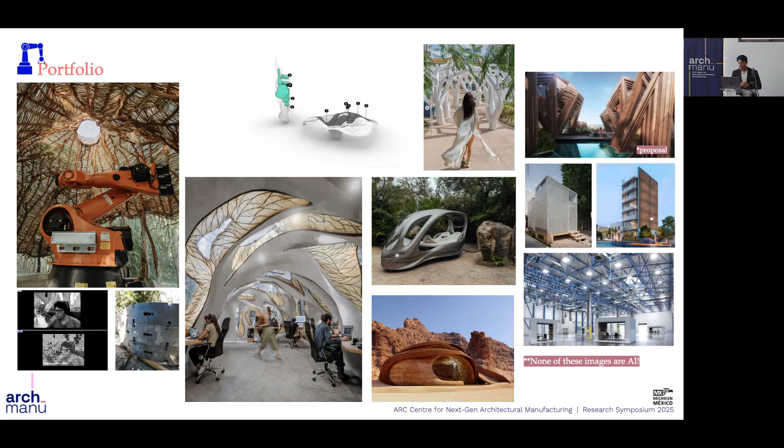So these are just a few examples of my previous work. All of them are real, by the way, no AI here. My experience has often involved blending natural landscapes, digital crafting, and custom code development, something that I look forward to applying during my research.

Right, so let's start with a picture of Australia. This image tells a story about a promise we're struggling to keep. Across the country, there are ambitious targets for building new homes set under the National Housing Accord. Nationally, the target was 60,000 homes per quarter of the year. Having completed just under 44,000, that's a shortfall of around 17,000 homes in just 3 months.

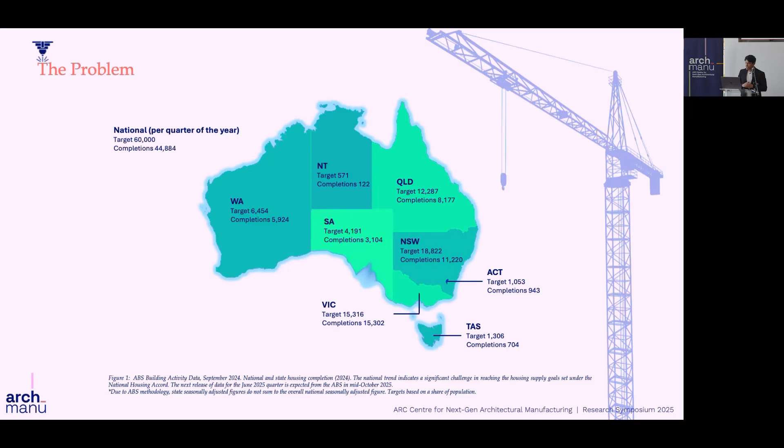As you can see, from Western Australia to New South Wales, this isn't an isolated issue. The national trend is clear. We are facing a significant challenge in delivering the homes that Australians need.

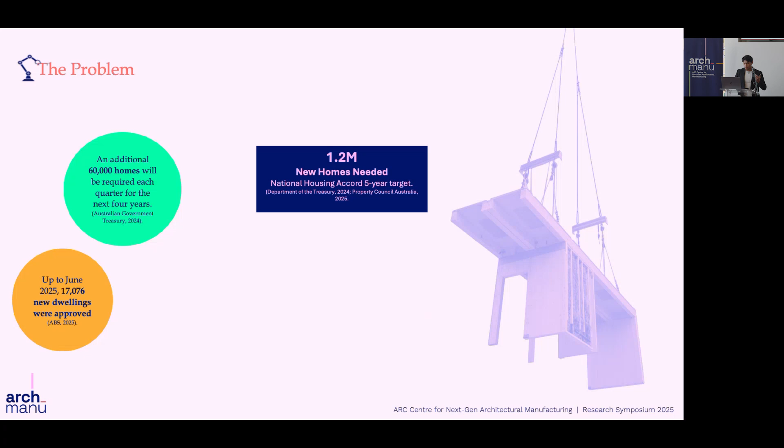So let's put some scale to that challenge. The national goal is to build 1.2 million homes over the next 5 years. To meet that, we need to build an additional 60,000 homes every single quarter of the year. The numbers are very, very low at the moment, and we are actually struggling to even get approvals ready.

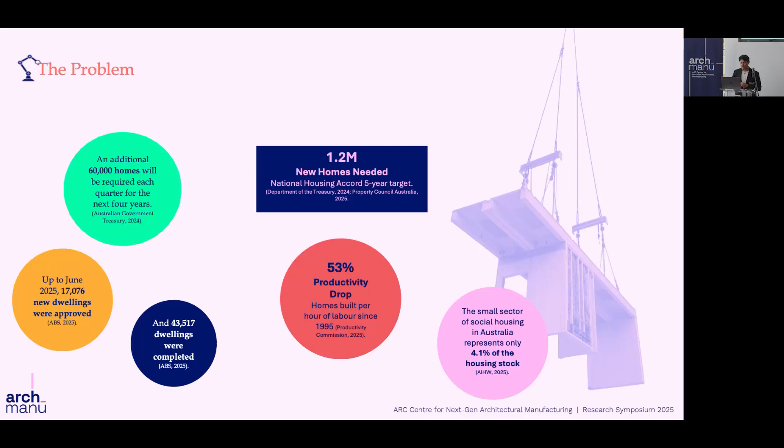But here's the paradox. While the demand for housing is soaring, our ability to build is actually going backwards. Incredibly, our productivity, the number of homes we can build per hour of labor, has dropped by 53% since 1995. Think about that. We are half as productive at building homes today as we were 30 years ago.

This crisis hits our most vulnerable the hardest. Social housing represents a mere 4.1% of our entire housing stock. There is a roadmap, however, that aims to tackle this by doubling the smart buildings market share and dramatically increasing the use of prefabrication. But as the latest figures show, we are nowhere near the pace we need to achieve this goal.

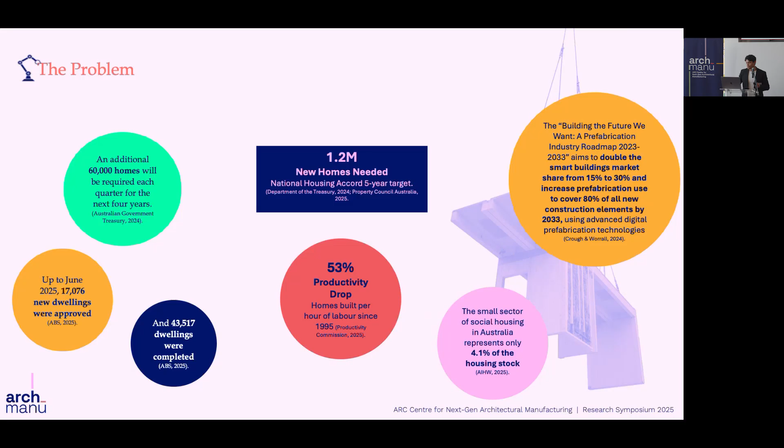Now, you might be thinking this is an overwhelming, almost impossible challenge. I would like to show you how other advanced economies are facing the issue. In Scandinavia, almost half of all houses are built off-site, with some estimates as high as 80%. In Japan, prefabrication isn't seen as cheap anymore. It is often associated with high earthquake resilience.

And Germany, for example, is using modular housing construction for single-family homes. And then we have Australia. We are using these modern smart building technologies in less than 5% of our construction. We have an ambition to triple that to 15% by next year. But the hard truth is we have no national strategy. We are being left a little bit behind, so this is a competitive disadvantage on a global scale.

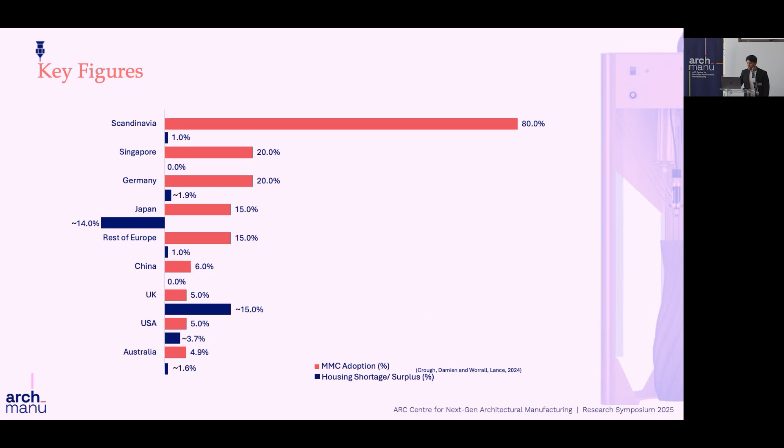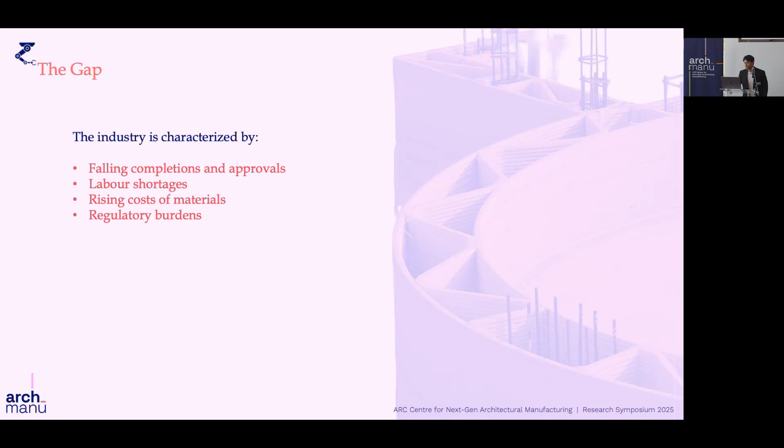In contrast, several countries with the lowest adoption of modern methods of construction are facing the most severe housing crises. So let's put it all together. What is the core problem? Our construction sector is facing systemic challenges. Falling completions, labor shortages, and rising costs are undermining our national housing goals. We have a proven solution, prefabrication and modern methods of construction, but our industry remains fragmented and slow to adopt the very technologies that could save it.

This fragmentation, this reliance on old ways, is part of the inefficiencies, and it's a critical gap in our capability.

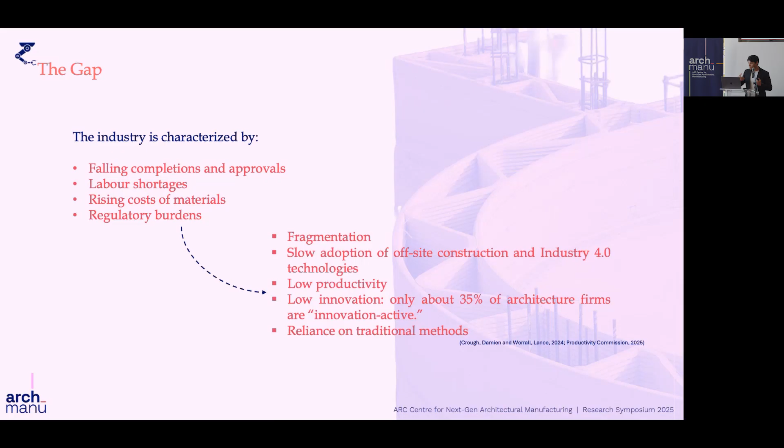It's part of the problem of preventing us from addressing the nation's housing crisis at scale. This is where my research comes in.

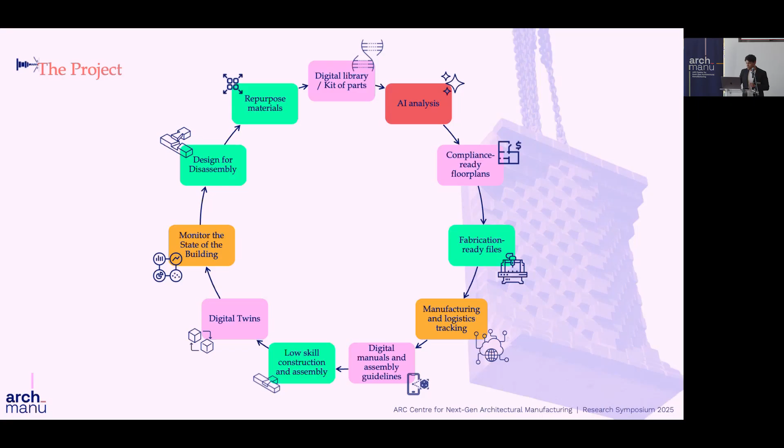This project will bridge some of these gaps by developing a data-led computational framework explicitly tailored for the industrialized manufacturing of affordable housing. Think of it as a digital nervous system for the construction practice, integrating core manufacturing philosophies like lean principles, design for manufacturing and assembly, with a suite of powerful digital tools, enabling the use of IoT sensors and digital twin implementation to predict how buildings will perform, and a flexible design and BIM platform to act as a central database for every single component.

The workflow will function as an integrated cycle where each stage informs the others through a data feedback loop. This transforms the construction process into a cohesive system, allowing seamless digital information flow between design, manufacturing, and construction for continuous optimization.

Now, an idea is one thing, but for this to be valuable to industry, I have to prove it works. My approach isn't theoretical, it is constructive. I am using a methodology called research through design, which basically means the knowledge created comes from the act of building, prototyping, testing, and refining the framework.

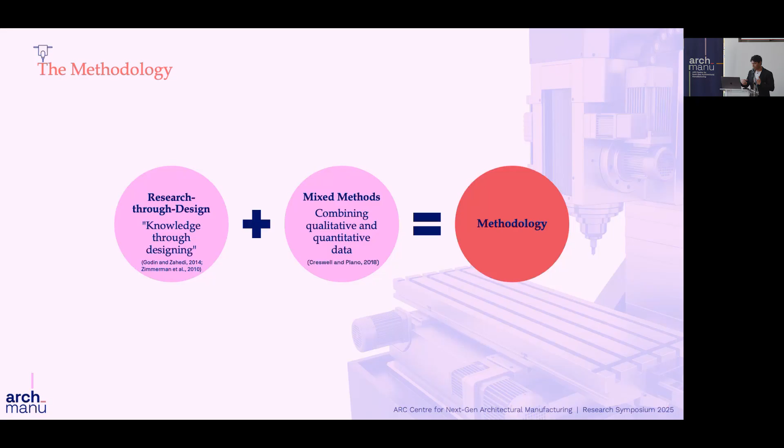Crucially, this process involves engaging with stakeholders, people like you in this room, to ensure that the digital prototype is actually developed and grounded in real-world needs. And to validate the findings, I'll be using a mixed method approach. I will combine qualitative data, the deep understanding of the why, with quantitative data, the hard measurable evidence, to measure the framework's impact.

So what does success look like? What could be the ultimate contribution? The primary goal is to deliver a validated computational framework, a practical blueprint that makes the housing manufacturing process more adaptable, more predictable, and completely traceable from start to finish.

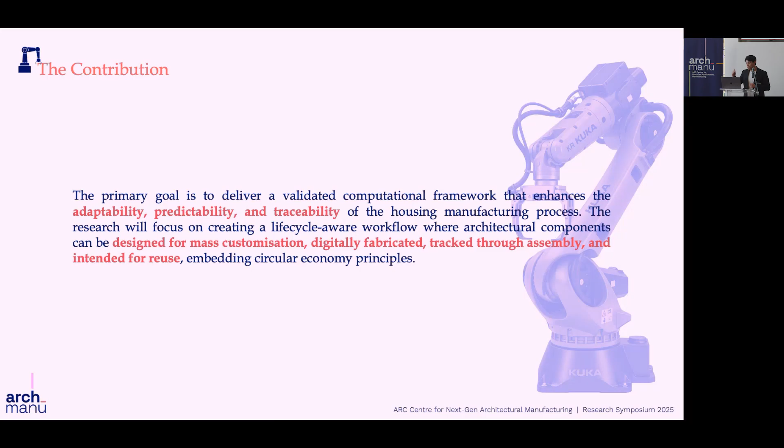Imagine a workflow where architectural components can be designed for mass customization, be digitally fabricated, and even tracked, embedding also circular economy principles directly into our buildings. Ultimately, this research contributes a novel socio-technical model to make housing delivery more scalable, more affordable, and efficient for all Australians. I look forward to connecting with like-minded innovators like you. Thank you very much for your attention, and I will be happy to answer your questions.